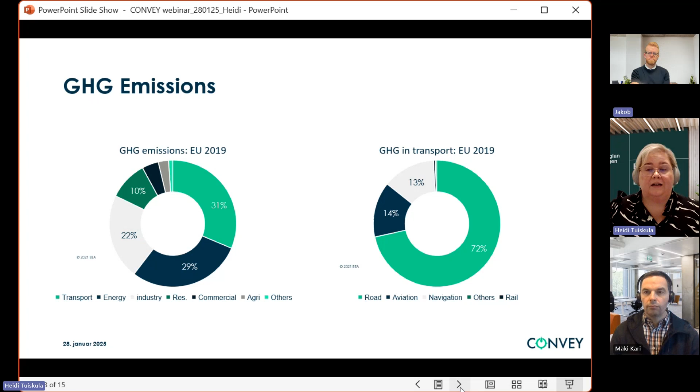Let us start with a simple question. Why green hydrogen? Well, the obvious answer when we talk about any renewable fuels or energy sources is the urgent need to fight climate change. We all know we need to reduce greenhouse gas emissions in all industry sectors with all means possible, and green hydrogen can be one of those. What makes green hydrogen interesting in this scenario is how versatile it is when it comes to its use. It can practically be used for all industry sectors to reduce CO2 emissions. In the CONVEY project, we will pilot the use of green hydrogen in transport and industry, replacing the traditional energy sources. Obviously, our location at port provides us an interesting opportunity to further expand the use cases.

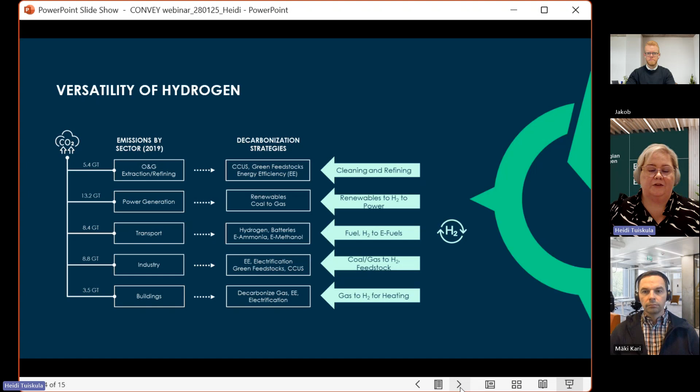Looking at the two previous slides, green hydrogen has an opportunity to be a significant contributor to reaching our decarbonization needs by 2050. If we would produce all hydrogen needed by 2050 through electrolysis instead of steam reforming it from natural gas, it would save 1.2 gigatons of CO2 per year. Obviously, this will not solve the whole problem, but it is part of the puzzle we need to tackle global warming.

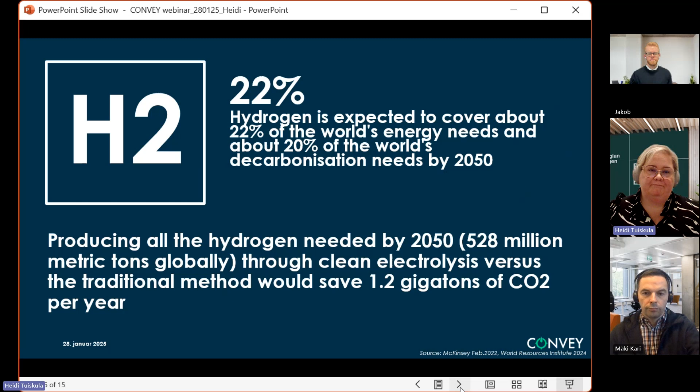This brings me to an important topic when we discuss hydrogen. The colors do matter. As I mentioned, at the moment, most hydrogen used is produced as what is called gray hydrogen, which is obviously equally emission-free when used in an application, like a truck or a ship. However, producing gray hydrogen creates emissions, so if we replace traditional fuels with hydrogen to reduce emissions, we should focus on green hydrogen, which is produced from water. The electrolysis is powered by renewable energy.

If we look then at how green hydrogen is produced, here you can see an example of a PEM water electrolysis process in which water is broken into hydrogen and oxygen via renewable electricity. The acronym PEM refers to the polymer membrane, which is used as an electrolyte in the process. This process uses approximately 9 liters of water to produce 1 kilogram of hydrogen and 8 kilograms of oxygen. In addition, it is possible to utilize excess heat from the process. To put the water consumption into perspective, the production of the jeans many of us wear needs 4,000 liters of water.

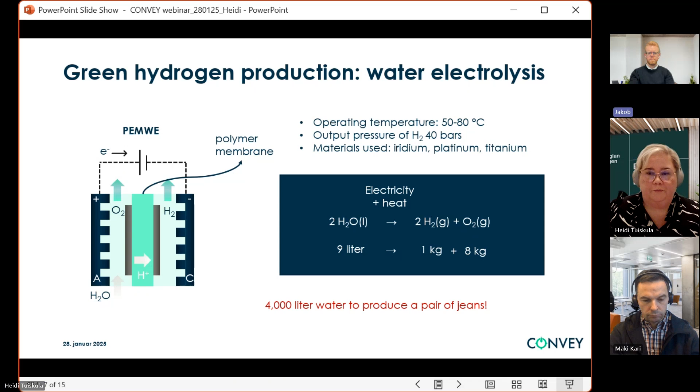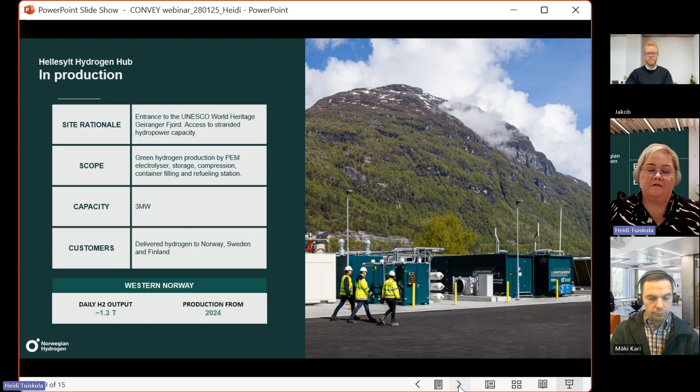If we look at the last year in Hellesylt, we started with hot commissioning, meaning commissioning with hydrogen in the system last June. And already before our grand opening in September, we were delivering to our first customer, Veidekke, who uses green hydrogen in the asphalt production process. You can see our 20-foot containers in the picture. They take approximately 450 kilograms of hydrogen each.

If we look at the 3 megawatt production plants, from a commercial point of view, these should be remotely controlled, obviously. And this was our goal from the beginning. However, operating an electrolyzer plant is more complex than most expect. So we wanted to start the operation safely with people on site to make sure that all our procedures for operation, including all the safety procedures and the technology, work together.

Nowadays, we can also produce remotely, but we have also engaged with the local community, and we have a person available for regular maintenance and activities on site. On our first winter during operations, we have experienced some challenges, and we're constantly investigating the effect cold climate has on operations. Now we deliver with multiple types of containers to our customers across the Nordics and have sold out most of the capacity already. This tells us green hydrogen demand is growing and more production is needed. This is very good news for the CONVEY project and the future of the green hydrogen market.

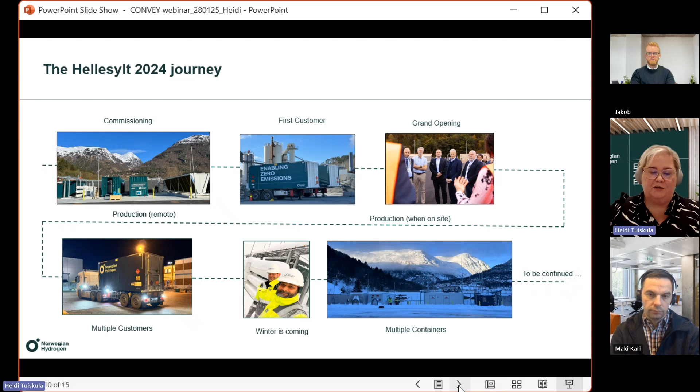Finally, let us dig deeper into the CONVEY project, taking benefit of the lessons learned in the Hellesylt project and expanding the scope of it. The CONVEY project is based at Port of Hirtshals in northern Denmark, where we are building a closed-loop ecosystem powered by green hydrogen. Our aim is to leverage local renewable resources, in this case wind energy, to create a sustainable cycle of production, use and byproduct integration that can benefit the port and the surrounding community.

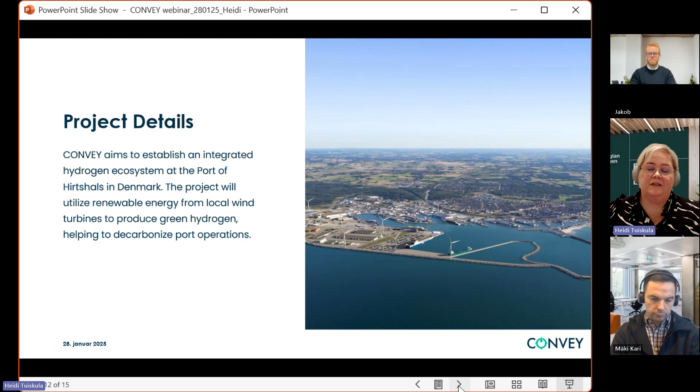So, why are ports significant to us as a green hydrogen ecosystem developer? I would say it comes down to a few aspects. First of all, ports as industrial areas with various stakeholders involved make a perfect showcase for green hydrogen use cases. In most ports, you can find various industrial actors as well as the full range of transport modes. This provides a great customer base for green hydrogen producers and refueling infrastructure developers. Then when it comes to replication, in Europe alone there are over 1,200 ports, thus demonstrating a solution at a port gives a huge replication potential.

Here you can see the timeline of our 5-year project. During our first year, we have been focusing on modeling and design aspects, as well as stakeholder engagement and business development. The coming 2 years are going to be important as we move from paper to real implementation. And as we all know, this is both a demanding and exciting phase in the project. During the final years, we will be in operation testing the solutions, business models and looking for replication opportunities.

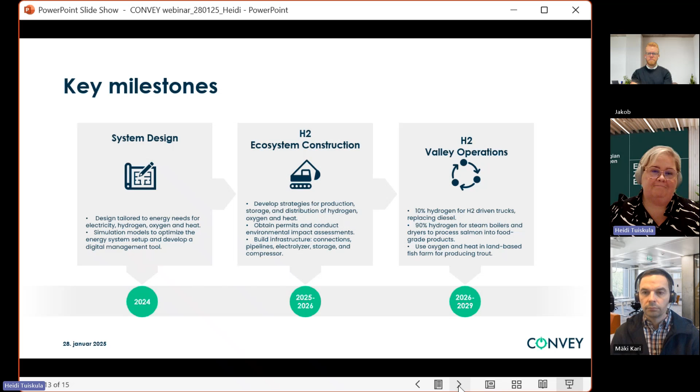We all know it takes a village to raise a baby or to build a new market. This is why we at Norwegian Hydrogen are not doing the project alone, but together with our partners. Port of Hirtshals, supported by Greenport North and Hirtshals Transport Center, are obvious partners, providing us access to the pilot location itself. Norwegian Hydrogen, with our daughter company Videon, are providing the hydrogen infrastructure and services, whereas SCADA International is looking at developing a tool for energy management at the port.

Our customers, Biomega, Onnest, and Vendelbo Spedition, are key to our success, being the frontrunners this industry needs. VTT, as our research partner, is focusing on both the technical ecosystem modeling as well as leading the business model development work. And finally, our partner Hydrogen Valley is helping us spread the story of the Hydrogen Valley in Port of Hirtshals and help us replicate it further.

At the heart of CONVEY is a 5 megawatt electrolyzer powered by wind energy, which produces green hydrogen. This hydrogen has two specific offtakes, industry and transport. The industry use case includes a food supplement producer, Biomega, located in the Port of Hirtshals, right next to our facility. And their aim is to replace the use of natural gas in their burners with green hydrogen. The transport use case includes our daughter company Videon building a green hydrogen refueling station for heavy-duty transport customers in connection to Hirtshals Transport Center, a logistical hub for all transport between Denmark and Norway. Vendelbo Spedition, a Danish logistics company, will invest in hydrogen-powered trucks to refuel at our station.

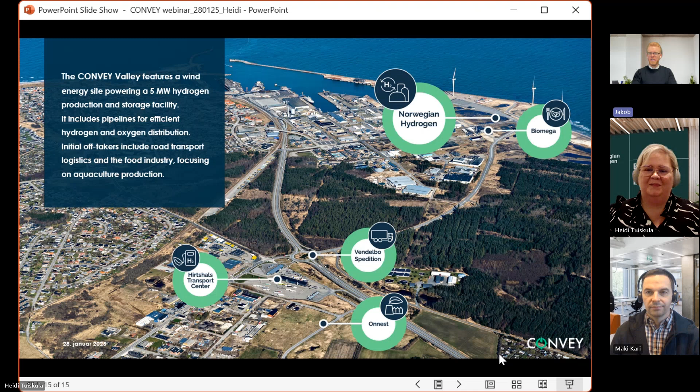So yes, my name is Kari Mäki. I'm with VTT, Technical Research Centre of Finland. I'm a research professor for smart energy systems at VTT, and also leading this CONVEY project from our side, together with my colleagues. VTT is a research institute, so we are working on more or less all fields of technological research, very much on the applied side. And we are very proud to be part of CONVEY.

Today I will speak about the sector integrated energy system model we have been building for the CONVEY case that was already presented. Just a moment, yes. So the agenda is pretty simple. I will start with the sector integration topic, why to integrate different kinds of energy vectors. Then we come to the CONVEY case, have a look at the modeling approach we used, some first results based on our studies, and then conclude briefly.

I would like to start with sector integration, which is the key interest for us in this CONVEY project. Starting from what's happening on the energy system side, and what is our vision for the integrated energy system of the future. There was already something mentioned about the decarbonization needs. The energy system at the moment is facing a lot of challenges, and is also a key driver, key enabler for the ongoing transition.

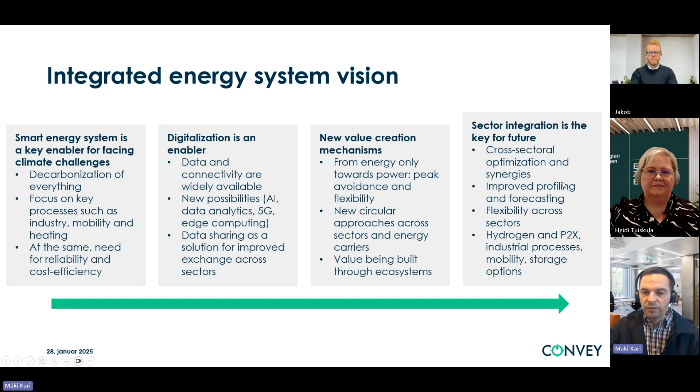And this is also a nice picture about the same thing. When we think about the future energy system, the starting point for everything is that we have clean electricity generation. So we have, as we have here, wind, solar, hydro, even nuclear. So we have different options. Then we are, of course, directly electrifying different things like mobility, industry, putting heat pumps in the buildings and so on, and that's an important part of it.

Another important part is of course that everything cannot be electrified, and also the electricity side will have some kind of bottlenecks. So hydrogen is really a valuable option there. Also as a means of storing the clean energy and a kind of buffer, and that's, for the industrial processes for instance, a very good option. So basically we will have side by side electricity, heating, hydrogen, maybe some other options as well, and they need to play nicely together, so to say.

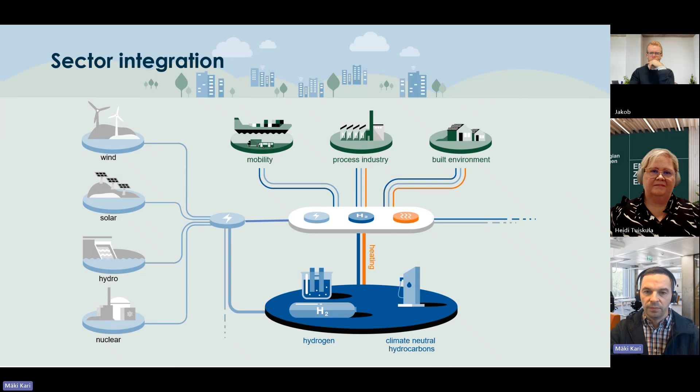Okay, this is a bit repeating, so I'm not going into all the details. But what is actually important here is exactly the focus on the sectoral interfaces. So what are the points in which, for instance, electricity and heat, or electricity and hydrogen and heat come together, and how can we optimize in these points? That's really an interesting aspect from the research point of view, but also for the practical applications.

Another thing is data sharing. Data is there, so we can be very much aware of what is happening, and we just need to be able to share the data better. So what we want to gain out of the sector integration is to be able to look at higher level optimums rather than very local, sector-specific sub-optimums. We want to see how the whole system, exactly like Hirtshals in Convey, can be optimized rather than one specific unit within that area.

That's an interesting thing. Then we are of course looking at the flexibility potential across the sectors. So if there is, for instance, hydrogen storage, a hydrogen buffer, what can we do towards the electricity market if there are price variations or even some kind of disturbances on the electricity side? How can we interplay in that case? So a lot of these kinds of synergies we are looking for.

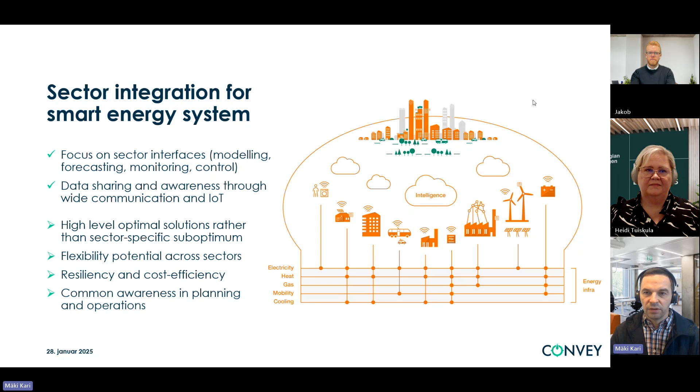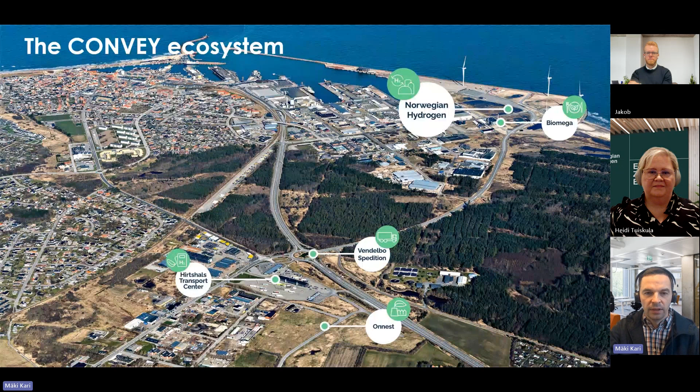But then I will actually come to the Convey ecosystem, and as I said, Convey is exactly demonstrating this kind of sector integrated energy system, and this is really an exciting case for us in that sense. You already saw this picture. I'm not wasting time on this. It's an interesting area. The ecosystem that is being built can be simplified like in this picture.

And maybe the most important thing there is that there will be hydrogen, heat, and oxygen side by side, so there will be three different carriers in this sense. Of course, electricity is also there, and that's also one important thing. But these three carriers are an outcome from the electrolysis, which is producing the hydrogen. And on top of that, there will be an energy management system, different kinds of data sources and data management and so on. But to me, this is exactly the core interest within the sector integration, how to play these different sectors side by side.

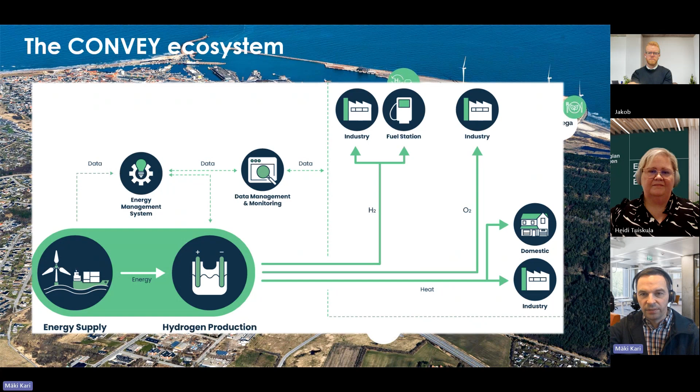First of all, we want to optimize. So we want to find the optimal parameters and combinations in this kind of environment where there are a lot of different kinds of variables, let's say. So this is maybe the key purpose for this kind of model.

Of course, it supports us for doing technical and economic analysis, also taking into account different kinds of tariff structures or markets and so on. But at the same time, we can also model the key components like electrolysis and other things at a detailed enough level to get a good understanding of what the choices are and how they interact.

So what we actually started with in CONVEY was a really wide data collection for everything that is happening on the site: wind power output, the electrolyzer, the different industrial off-taker applications that were also mentioned by Heidi, the infra, and more or less everything. Especially, we used a lot of time to understand the off-takers, their needs and their profiles, because one really important aspect here is to be able to match the supply and the need, see how the profiles fit together, and whether there is a need for storage.

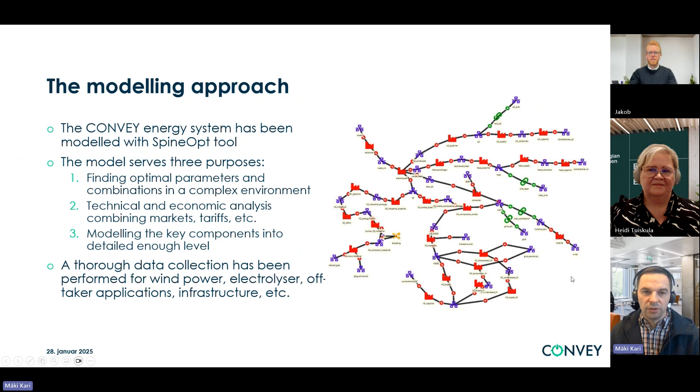Of course, the model can only be as good as the data we start from, so in this sense the data collection has been really important. Now that we have the model running, we are still able to improve it all the time with more parameters, better data, and so on. From now on, this is the tool we are using for the CONVEY project. If I didn't mention, this was modeled with the SpineOpt tool, which is an open source tool, and it is quite commonly used by VTT as well.

Just to go a bit more into detail, the optimization problem we are looking at is formulated as a cost minimization problem, so we put a cost on everything that will be done there. We started from 1-hour steps and then progressed to 10-minute resolution, which allows us to capture intra-hour dynamics in the studies. It's still not a fully dynamic simulation, but it runs through the whole year at this resolution and looks for the best options, so to say.

In the picture, you can see the different components we have been modeling and the different grids or carriers, with different colors for electricity, heat, hydrogen, and oxygen. As I said, this is a really interesting case in the sense that everything depends on everything: what the heat supply need is in different parts of the system, what the oxygen supply need is, and how things should be dimensioned. So it's really a multi-dimensional and very interesting system.

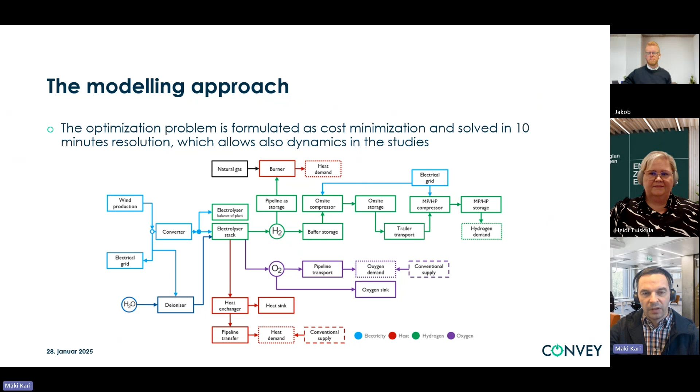With this model, I wanted to pick some example results. We are working on it all the time, and as I said, we are getting more and more out of it as we get more data and improve the model. But we have definitely completed the first runs, and we have good result data already available. One example is the economic value. We looked at different options: first, how much hydrogen will be produced, then the offtake level, and we looked at the economic value for the whole system under different assumptions.

You can see that on an annual basis, the economic value potential is about 1.5 million euros in the minimum case, and in the best case even more than 3 million euros. Of course, that's for the whole system, so it is shared across the stakeholders depending on the business model, for instance. But the point here is that the system would be more cost efficient to run, and there would be a clear economic value behind that.

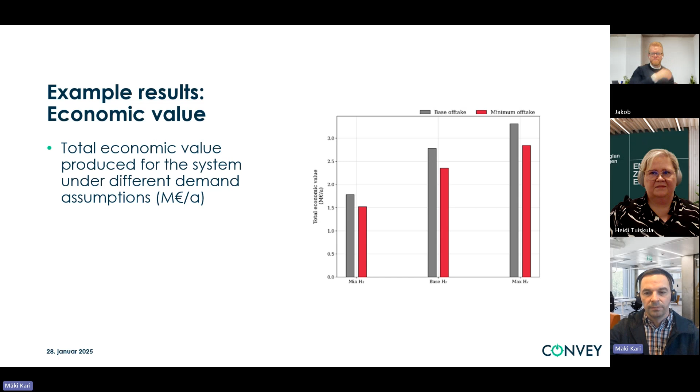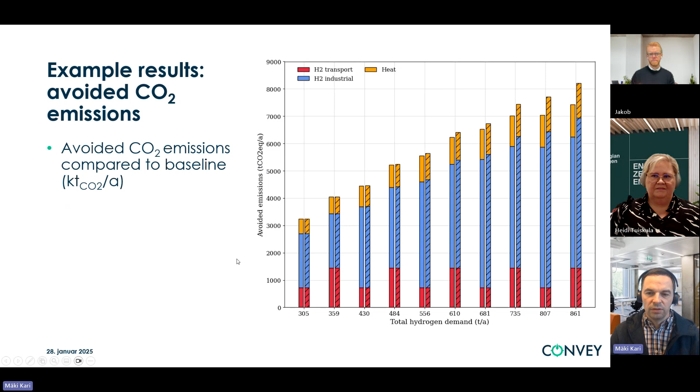But then it's also interesting to see different colors. So according to our scenarios, certain part of that comes from the transport, certain part comes from the industrial side, then from heat as well. So you can see that the industrial use is maybe somehow dominating in this case, but there will be improvements on all these sectors. And there is also another way to look at the avoided CO2 emissions.

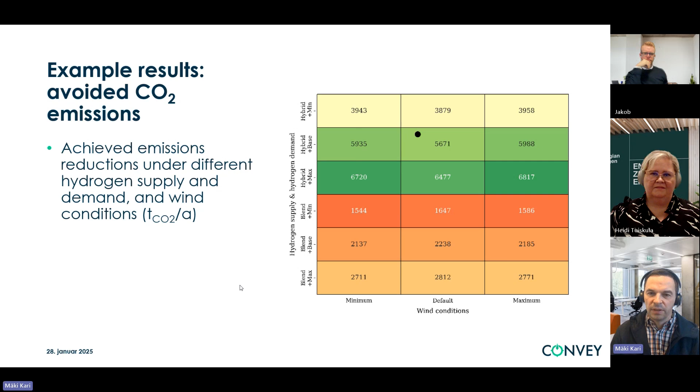Yes, I just wanted to conclude very briefly, a bit repeating what I was already saying, but also highlighting the key points. So I started with the sector integration story, how that offers an important approach for synergies and flexibility across sectors. This is really an interesting development, and this is what is also realized in the CONVEY ecosystem. And then this modeling work I was presenting supports analyzing and optimizing this kind of complex systems.

So we have the cross-sectoral situation, and we have the exciting case with the oxygen also there. So this is a really interesting modeling case, and we have the model now up and running. We are able to look at different kind of options there. So altogether, CONVEY demonstrates new circular concepts, and this can really be replicable across many similar locations.

So we also have some business model related activities ongoing, and we are looking at similar ports first of all, but then also different kind of areas where the same concept could be brought in. And actually what we have modeled is really applicable on a wide range of different kind of areas and cases. And the model is also such that we can use different kind of parameters, look at different kind of cases, and be really efficient in that sense.

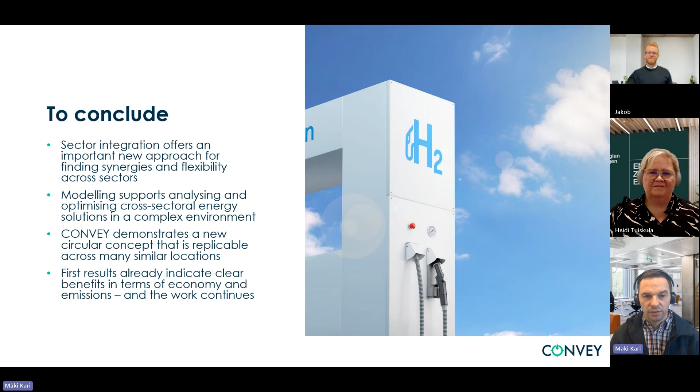And yes, I was also showing the first results. They already indicate clear benefits for the economy, for the emissions, and of course there is much more result data behind, a lot of analysis on different components and so on. There will be more results later on, and the work continues here.